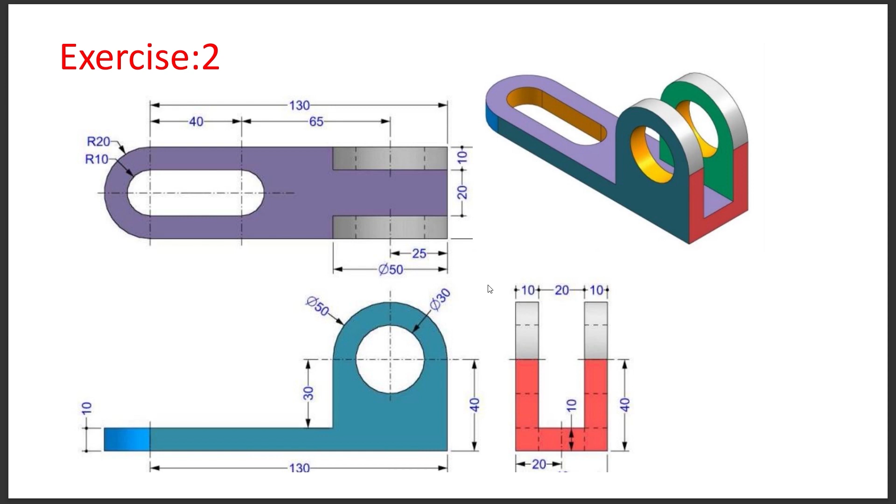Right. First of all, we need to start a new design, and we can save this one as exercise 2, and we can save it to a specific location, and we are saving it to Fusion. Okay, done. First of all, we need to draw one rectangle of length 130 and breadth 40 millimeter, right? And that is to be extruded to a depth of 10 millimeter, right?

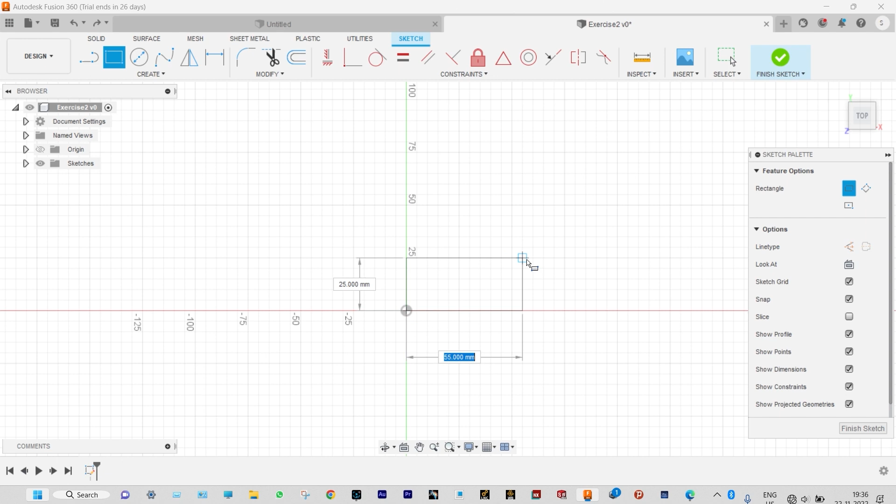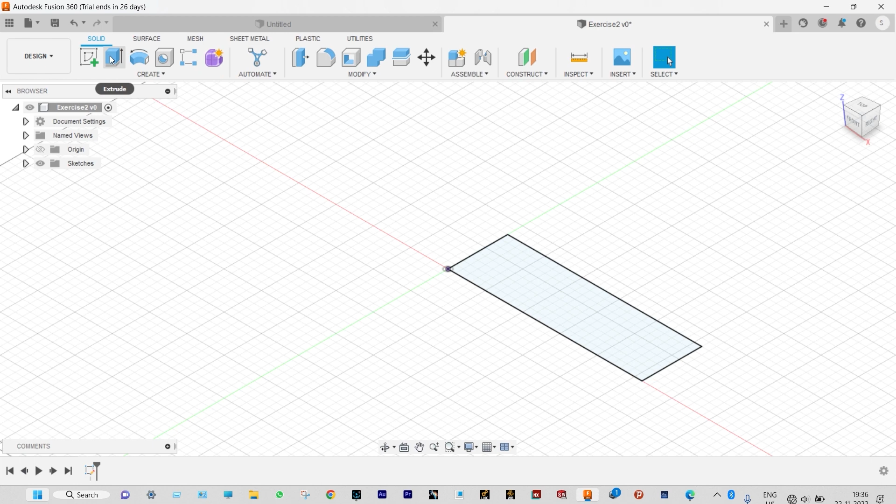So without any dimension, first of all, we can make one rectangle. This one will be the center. Let us make a rectangle, and we are providing smart dimension to this one as 130 millimeter, and it will be 40 millimeter. Done. Drawing is complete. So we can finish the sketch, and next, you can provide depth of this one as 10 millimeter. So extrude. We are providing extrusion depth of 10 millimeter.

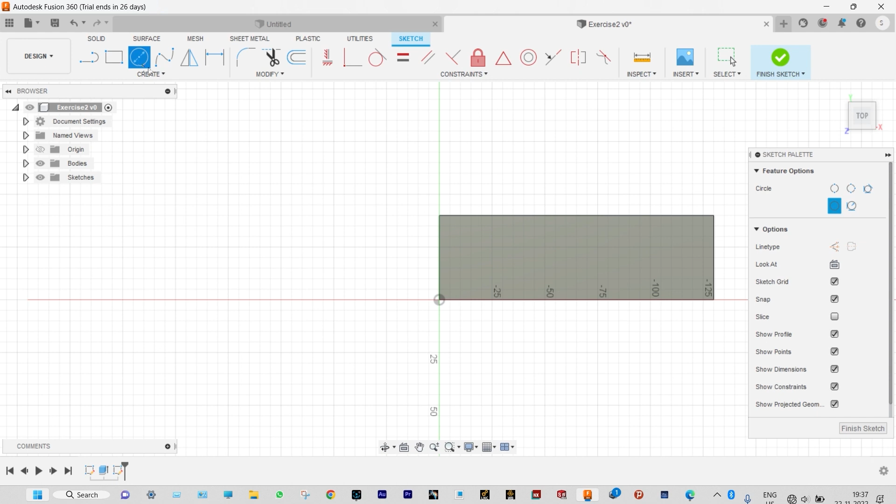Done. Right. Now at this surface, we need to draw one semicircle of radius 20 millimeter. Let us select the surface. We're starting sketch, and we need to provide a semicircle of radius 20 millimeter at this location, right? Done. We can finish the sketch, and that is to be extruded to a depth of 10 millimeter. So extrude. Let us select that location. We need to extrude downwards to a depth of 10 millimeter. It's -10. Okay, done.

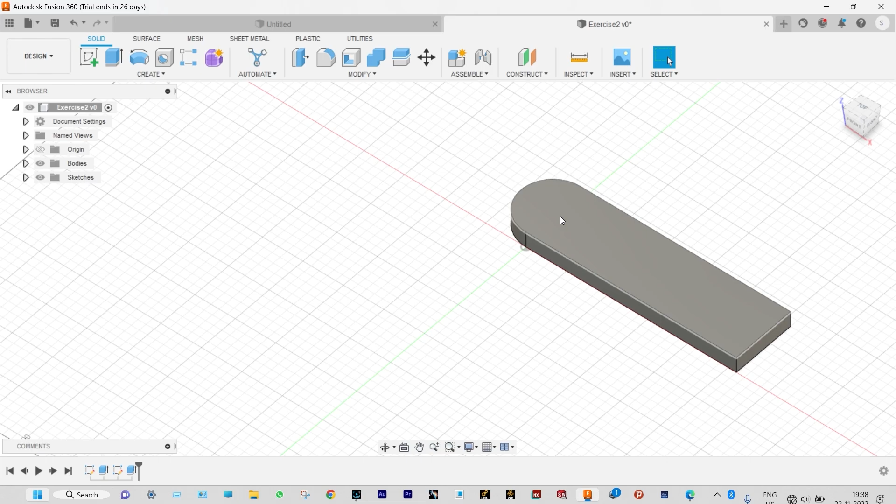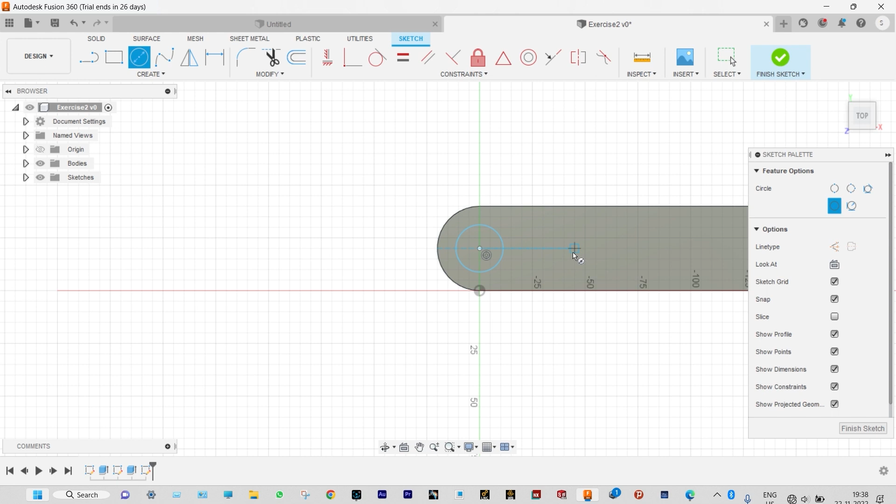Now here at this location, we need to provide a slot. Let us see the drawing again. Here we need to provide a slot of radius 10 millimeter, and the distance between the centers of the circles is equal to 40 millimeter. So let us select that plane, and we can start sketch on that plane. Circle. We are placing circles at any arbitrary position, and with constraint, let us make the radii of the circles equal, and let us provide smart dimension to this one as diameter 20 millimeter.

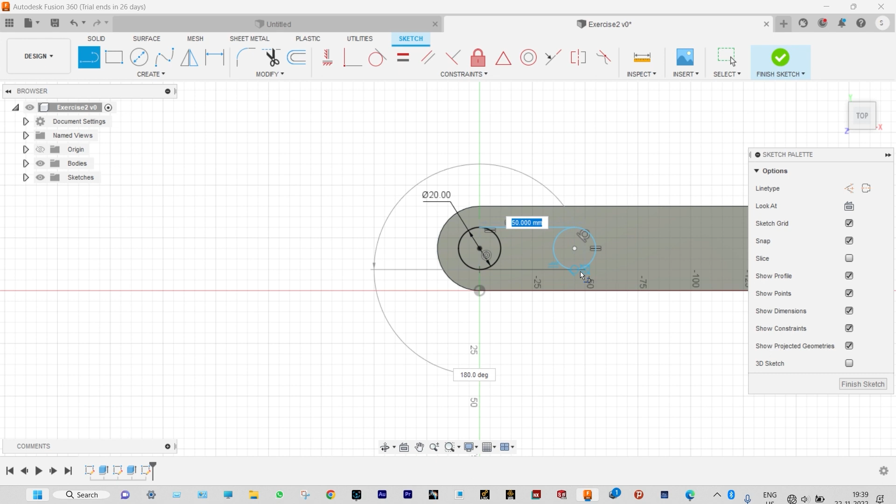Done. Let us draw lines from here. They will be tangent to both the circles. Done. The distance between the centers should be 40 millimeter. So you can select the center distance. It will be 40 millimeter. Done. Now we can trim the unwanted entities.

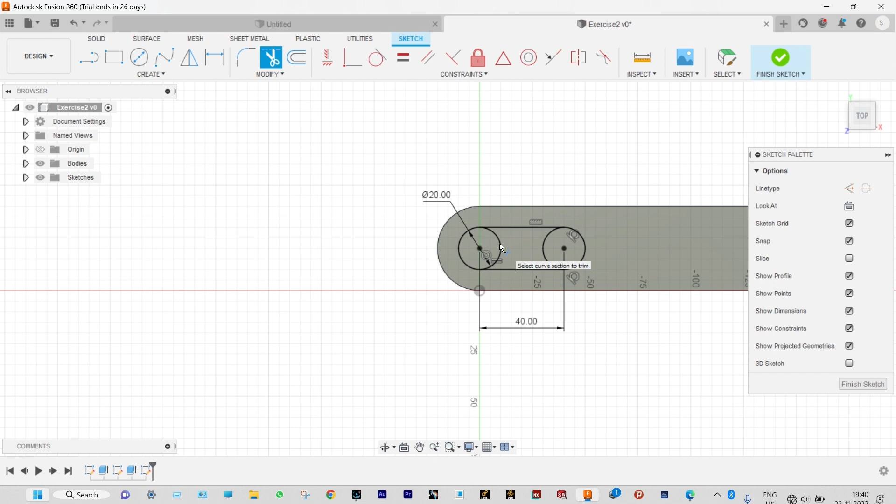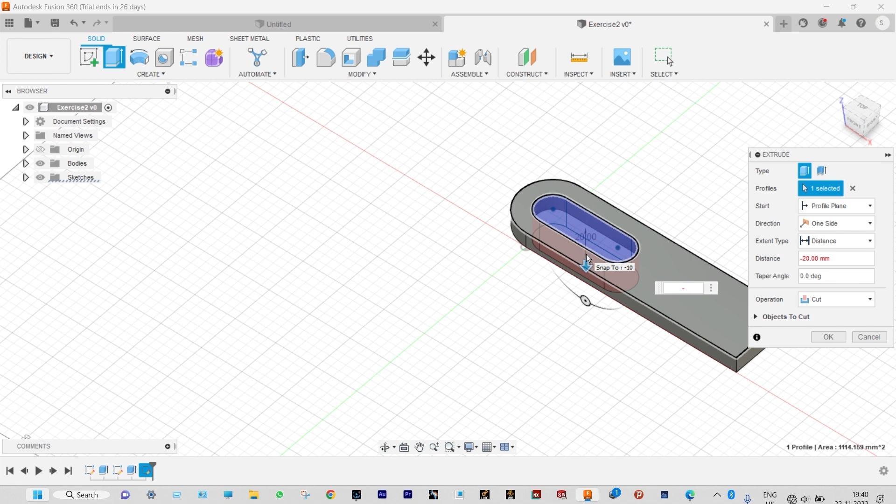The drawing is complete. Now to make the slot, we need to remove this using extrusion in the negative direction. So let us select that space, and we need to extrude this one in the backward direction to a depth of -10 millimeter. Done. Right. Now let us see the drawing again. At this surface, we need to provide this one. So we can see the front view here itself. From this surface at a height of 30 millimeter, we need to make this rectangle again, right?

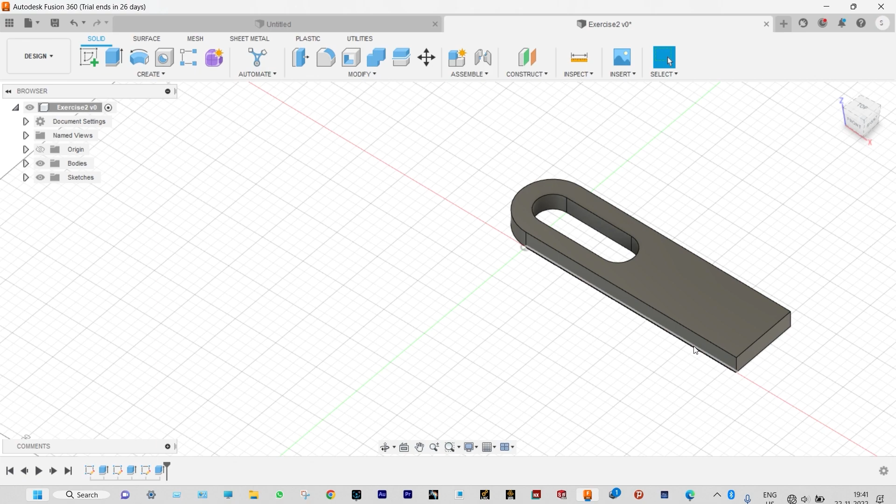Again, select the surface. Let us start sketching on that surface. Initially, without any dimension, we'll draw one rectangle. And at this location, you have to provide one circle. Now let us provide smart dimensions. You can see the drawing and provide smart dimensions. Distance between this point and that point is equal to 50 millimeter, and height is 30. So length is 50 and height is 30. Smart dimension, this one is 50. And height will be 30.

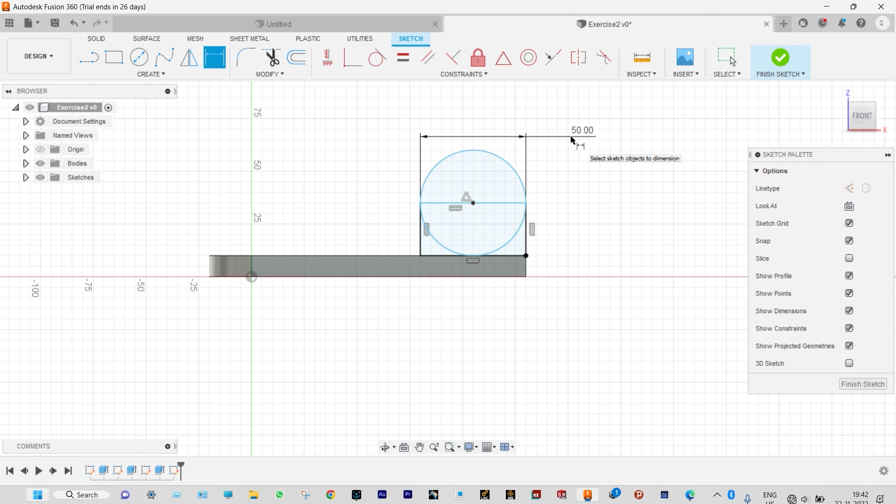Done. And we can delete some unwanted entities. Let us trim it. We need to draw one circle again here. Let us see the dimension of this one. It has a diameter of 30 millimeter. So from smart dimension, you can provide this one as 30 millimeter diameter. Done. And again, you can provide dimension to this one as radius 25 millimeter.

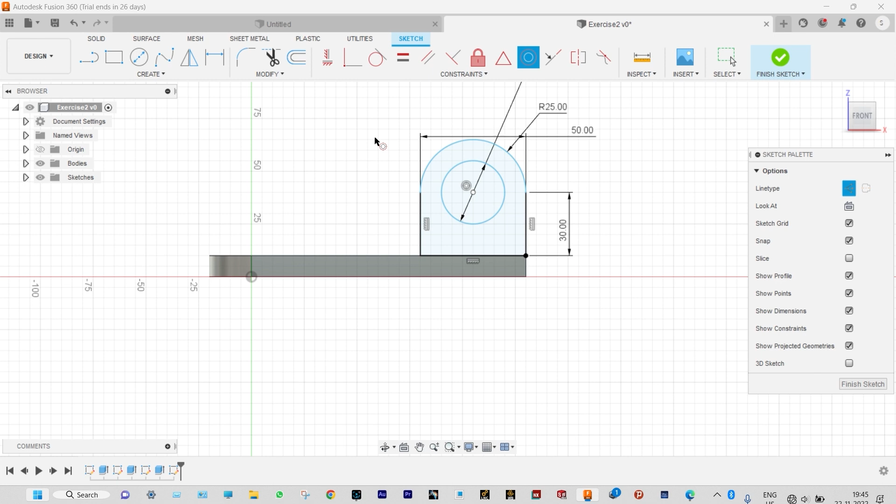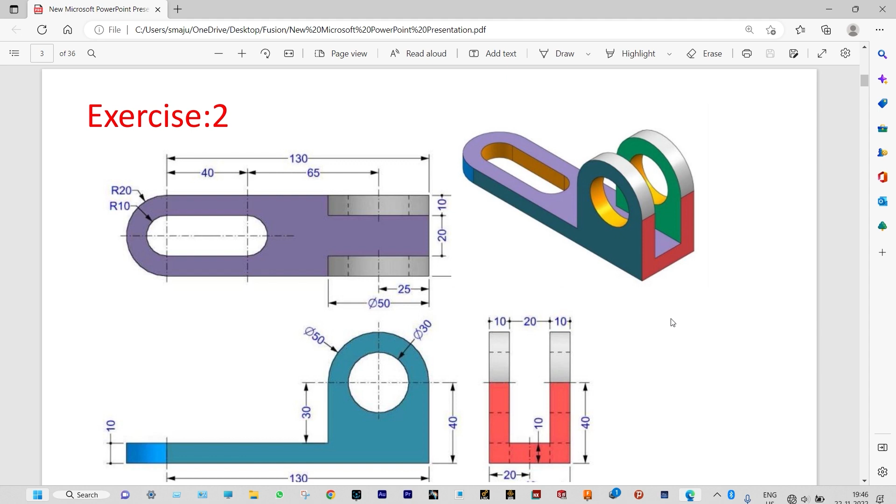We made one construction line and the drawing is completely black. That means all the constraints are satisfied. We can finish the sketch right now and that is to be extruded. You can see how much extrusion is required. That is to be extruded to a depth of 10 millimeter. So extrude. Let us select that specific area and that is to be extruded in the backward direction to a depth of 10 millimeter. In the negative direction it will be minus, right? So it will be minus 10 millimeter.

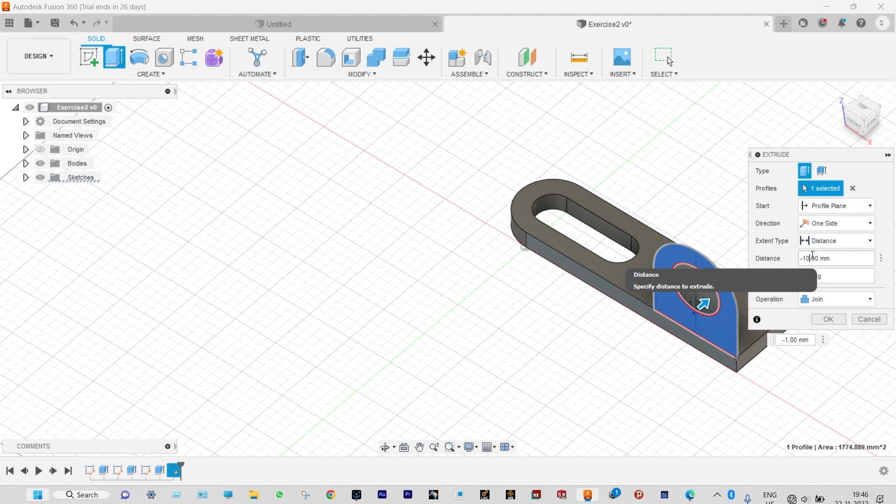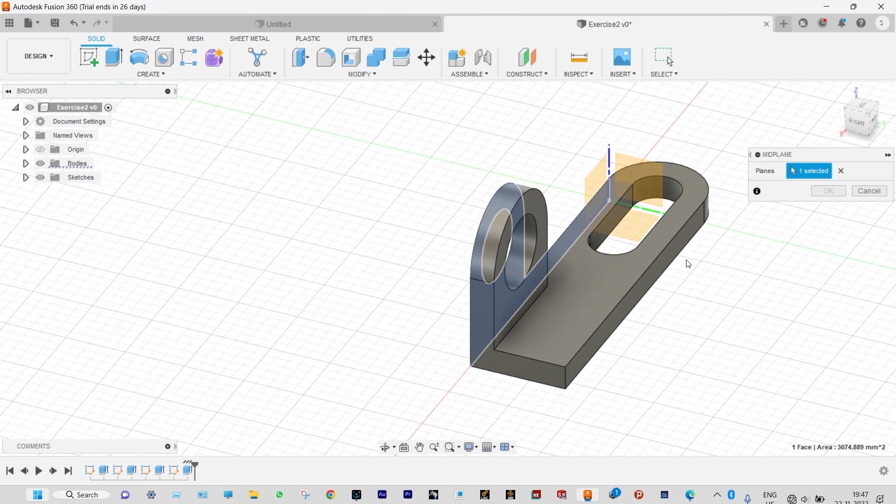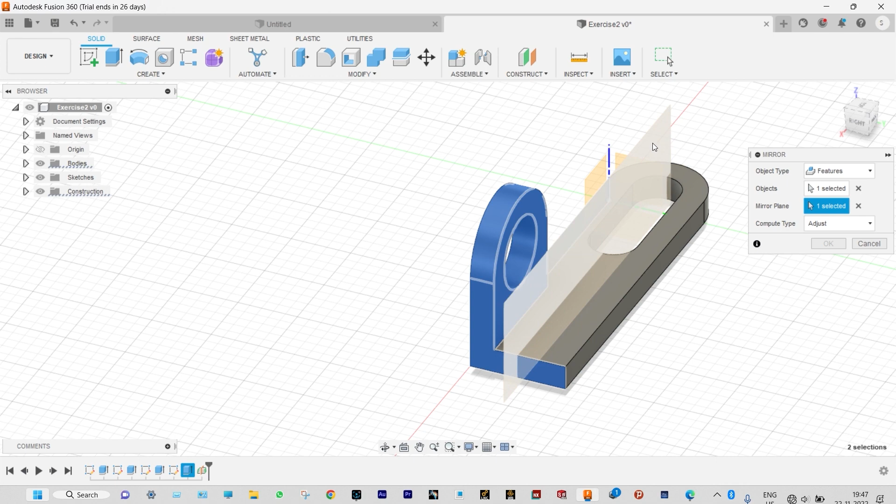Done. Next, we need to provide a mirror of this one with respect to the middle plane, right? So we can make a plane from here, construct mid plane. So in between this one and the back side, we need to provide a middle plane. Middle plane is made. Now with respect to this plane, we need to make a mirror of this one, right? So we can create a mirror. Let us select the features and that is to be mirrored with respect to this plane. Done. It's complete. Now we can hide this plane also.

Let us rotate this one. Our drawing is complete, right? So this is a very simple drawing. What we have done is we have made the sketch at the top plane and that was extruded to a depth of 10 millimeter. And again at the front side we have provided this sketch and that was extruded to a depth of 10 millimeter. And with respect to the middle plane, we made a mirror of these features, right?

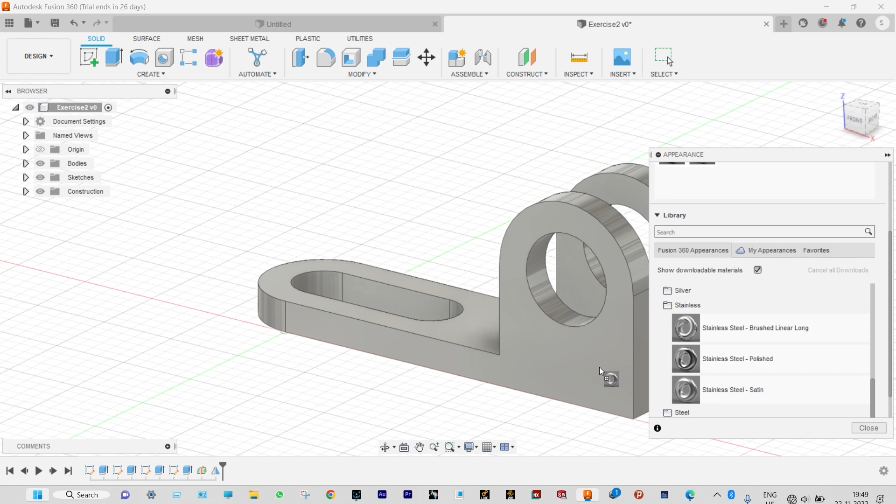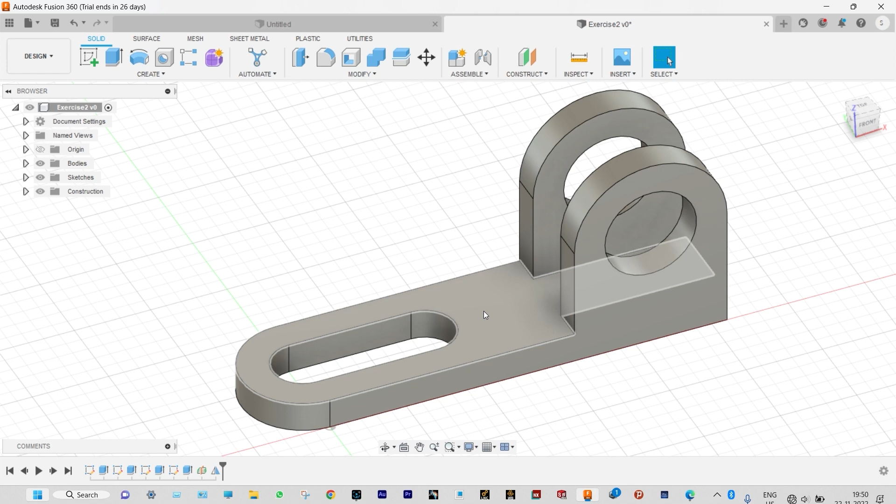Now we can do one thing. We can change the appearance of this one. Let us hit the letter A and provide color to this one with metallic satin stainless steel. Okay, done. So this is our model. You can see it. This was a very simple model, and through this modeling we learned sketching and also extrusion. At the same time we learned one feature known as mirror with respect to one specific plane, right?